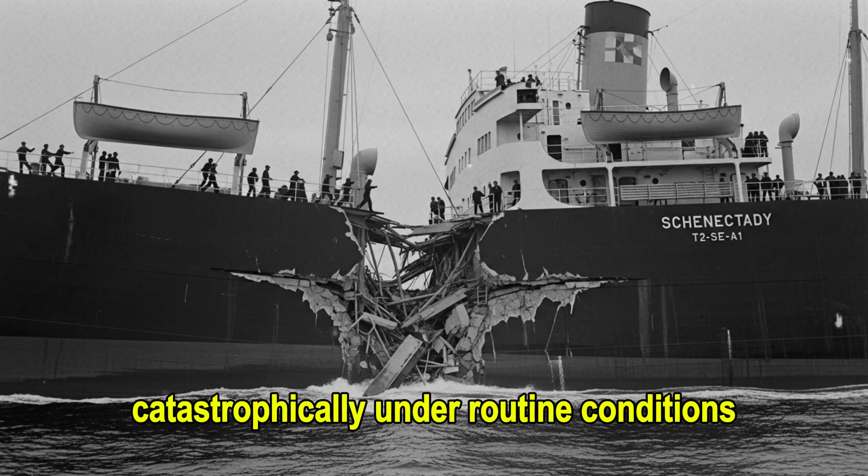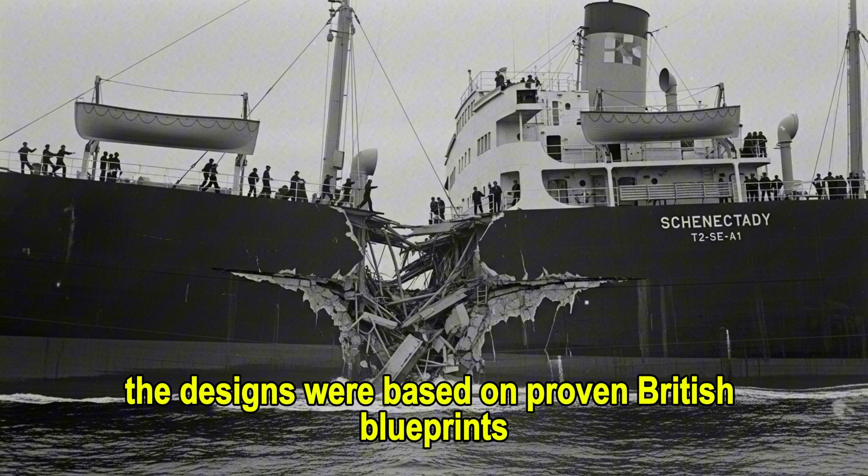But then the nightmare began. Ships started breaking spontaneously, catastrophically under routine conditions. Naval architects were baffled. The welds looked solid, the steel met specifications, the designs were based on proven British blueprints. Yet Liberty ships fractured like porcelain teacups, the cracks propagating at terrifying speed. The miracle of mass production had become a maritime nightmare, and no one could explain why.

This is a story of a hidden flaw, a looming disaster, and how an unexpected hero emerged from the most unlikely place. Stay tuned as we unravel this incredible historical mystery.

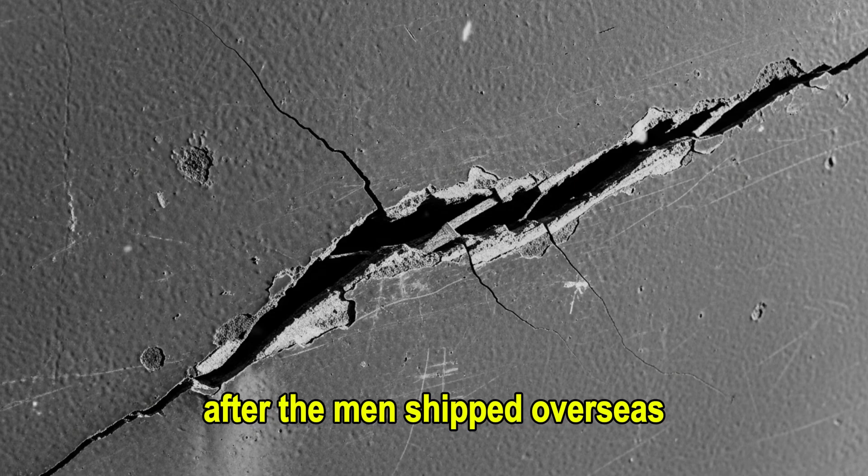The answer came from the least likely source, a welder on the assembly line who wasn't supposed to question engineering decisions. Bessie Hamill worked the graveyard shift at Kaiser's Richmond Yard No. 3, one of thousands of women who'd flooded into shipyard work after the men shipped overseas. She'd been welding hull sections for 8 months, long enough to notice something the engineers apparently hadn't.

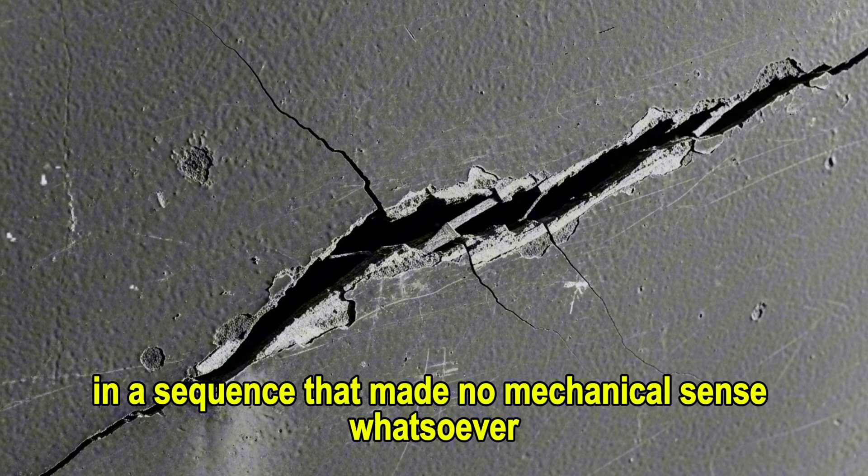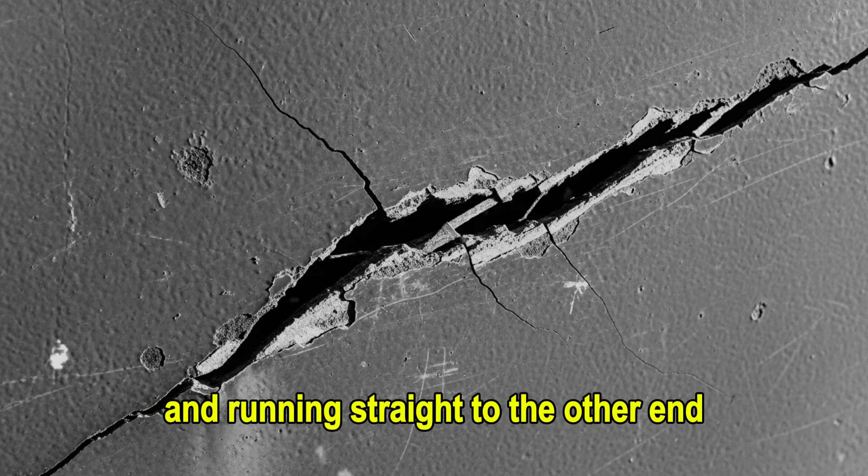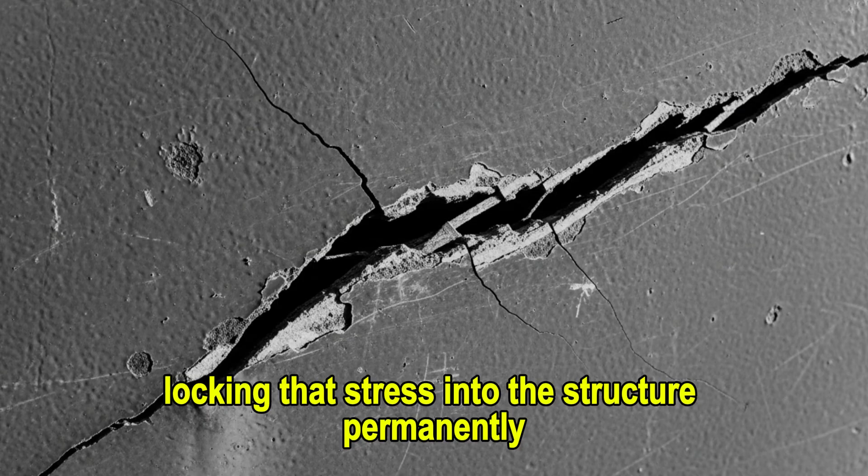Every night, she watched her team weld massive steel plates in a sequence that made no mechanical sense whatsoever. Hamill saw welders starting at the edges of plates and working inward, or beginning at one end of a long seam and running straight to the other end. As each weld cooled, the metal contracted, pulling and warping the plates. She could see the stress building, watch the steel distorting under her torch. When welders finished one section and moved to the next, they were effectively locking that stress into the structure permanently. It was like tightening the center bolts on a car wheel before securing the outer ones, a recipe for imbalance and failure.

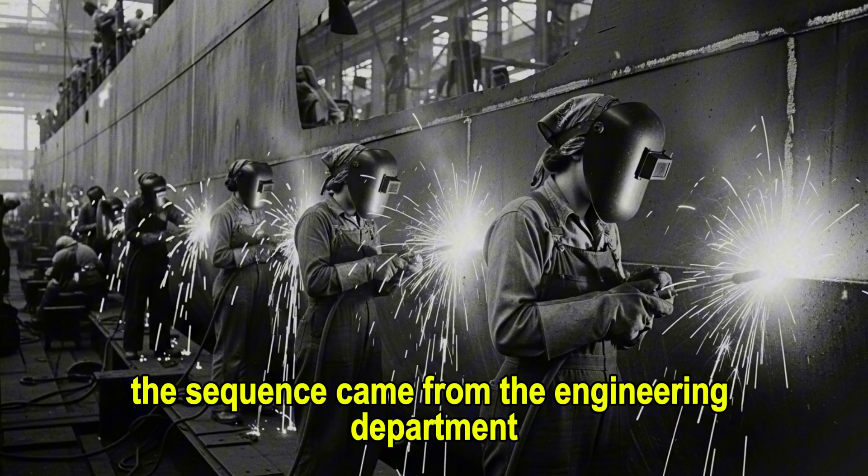Her foreman dismissed her concerns. She was a welder, not an engineer. The sequence came from the engineering department, from men with college degrees and naval architecture training.

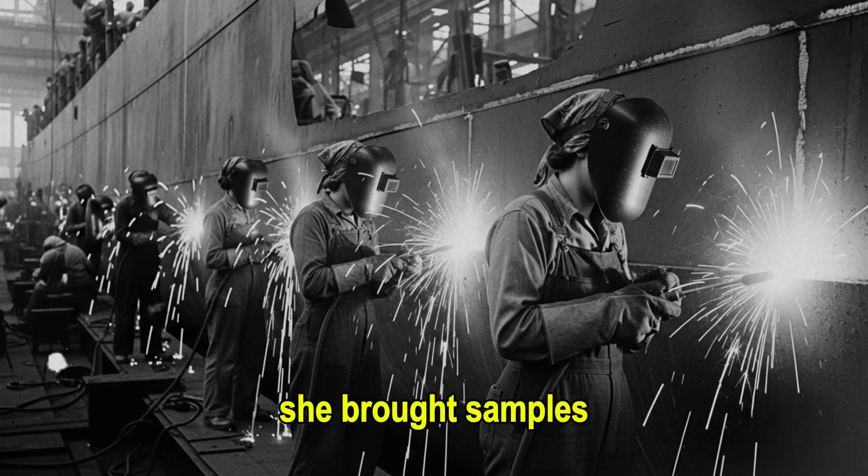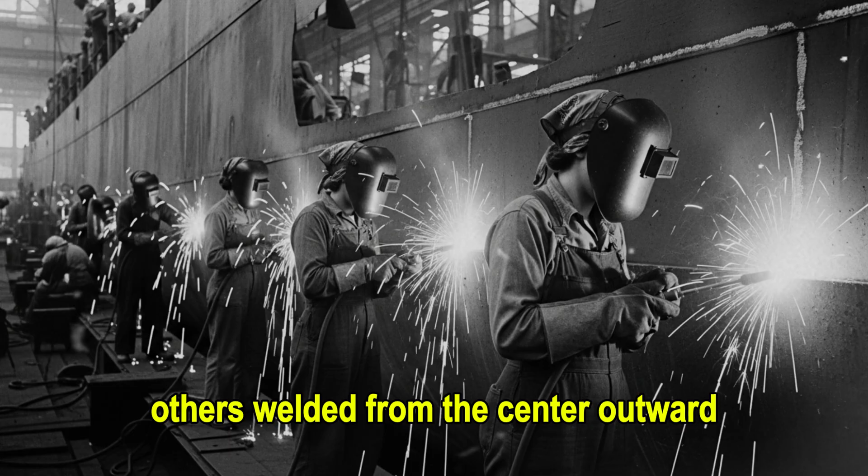Hamill persisted anyway. In November 1943, she requested a meeting with yard supervisors, breaking chain of command protocol that could have gotten her fired. She brought samples, test plates she'd welded on her own time using different sequences. Some showed significant warping and visible stress patterns. Others, welded from the center outward in a carefully planned sequence, lay flat and true with minimal distortion.

The supervisors were skeptical but intrigued. One agreed to observe the production line during Hamill's shift. What he saw confirmed her observations. Welders were essentially torturing the steel, forcing it to accept stresses it would carry for its entire service life.

Every cooling weld created residual tension in the metal. The construction sequence meant these internal stresses accumulated and concentrated at specific points, particularly at the corners of hatch openings and other stress concentration points. When those ships hit cold North Atlantic water, the steel became brittle. The locked-in residual stress combined with brittleness created perfect conditions for catastrophic fracture.

Hamill's insight was elegantly simple: weld from the center of sections outward, allowing stress to dissipate toward the edges rather than concentrate in the middle. Alternate welding locations to prevent heat buildup in any single area. Never complete welds in long continuous runs. Instead, use a balanced sequence that distributed cooling stresses evenly. These weren't revolutionary metallurgical theories. They were practical observations from someone who actually worked with the material every day, who felt the metal move under her torch, and recognized the consequences.

By December 1943, her observations reached Henry Kaiser himself. He faced a brutal choice.

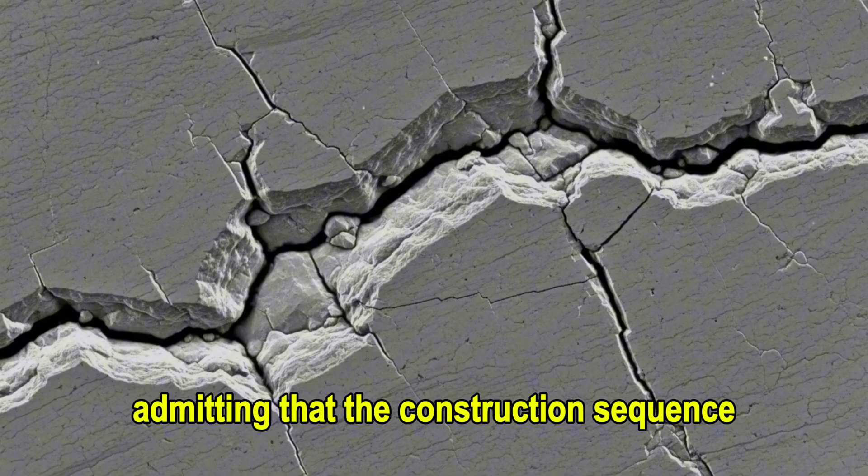The Liberty ship program was already under congressional scrutiny for the cracking epidemic. Admitting that the construction sequence, not the steel quality or weld integrity, was the fundamental problem meant acknowledging that every ship built so far had systematic flaws baked into their hulls. It meant temporarily slowing production to retrain thousands of welders. It meant redesigning the entire assembly process. But it also meant potentially solving the fracture crisis that threatened to undermine America's entire maritime logistics chain.

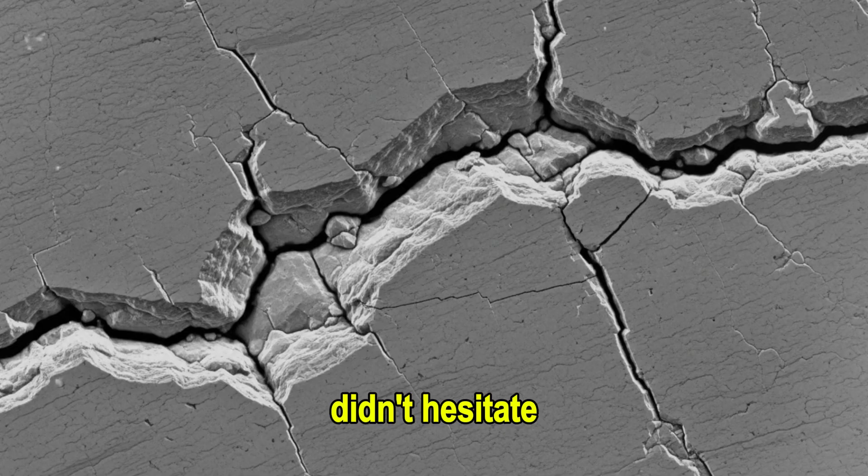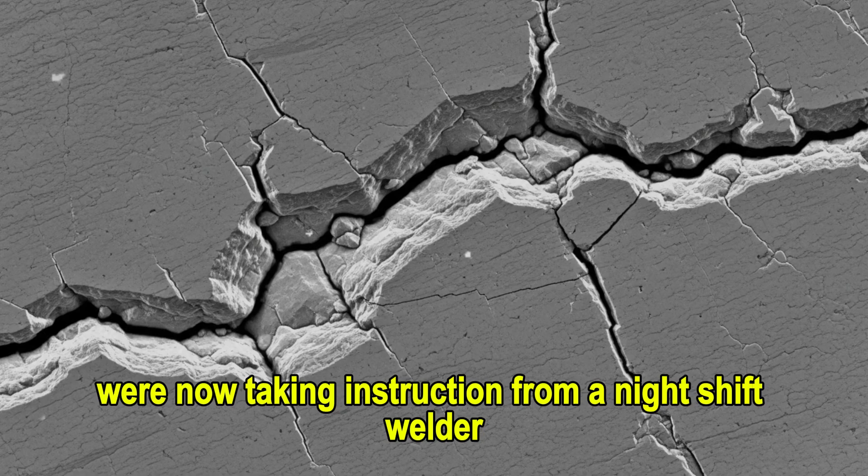Kaiser, to his credit, didn't hesitate. He authorized immediate testing of Hamill's theories, pulling an entire hull section from the production line for experimental reconstruction. The metallurgists and engineers who'd spent months analyzing failed ships were now taking instruction from a night shift welder who'd never seen the inside of a college classroom.

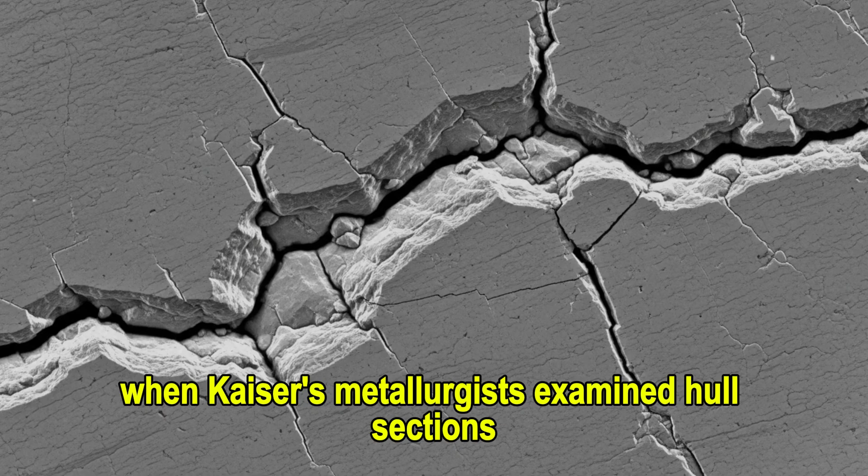The physics behind the failures finally became clear. Steel is not a static material. It's a crystalline structure that responds dynamically to temperature changes. When welders run a torch along a seam, they're creating a localized temperature exceeding 2,500 degrees F. The metal expands dramatically in that heat zone. As the weld cools, it contracts, but the surrounding cold steel constrains that contraction. The result is residual tensile stress locked permanently into the structure unless the welding sequence allows the stress to redistribute.

Liberty ships were suffering from what metallurgists call brittle fracture propagation. The steel used in their hulls, a carbon steel designated as shipbuilding grade, performed adequately in warm water, but underwent a critical transformation in the North Atlantic's near-freezing temperatures. Below roughly 40 degrees F, the steel's ductility collapsed. Normally, metal absorbs stress by deforming slightly, bending rather than breaking. Cold steel loses that flexibility. It becomes brittle, more like glass than the tough material welders worked with in California's mild shipyards.

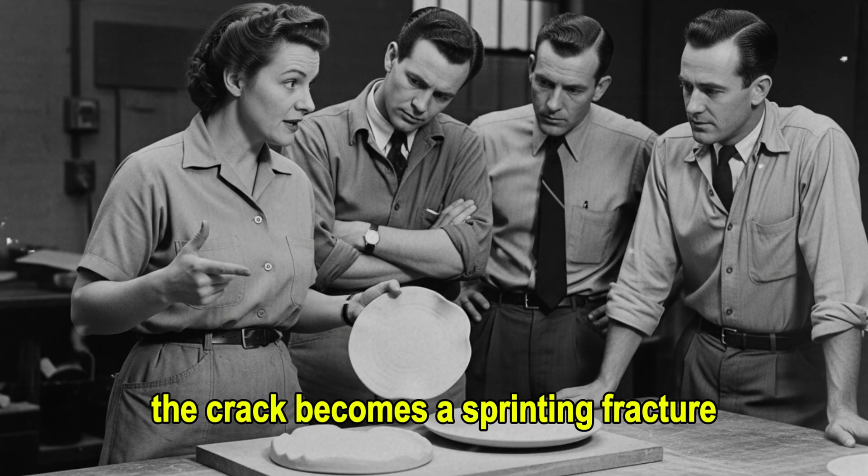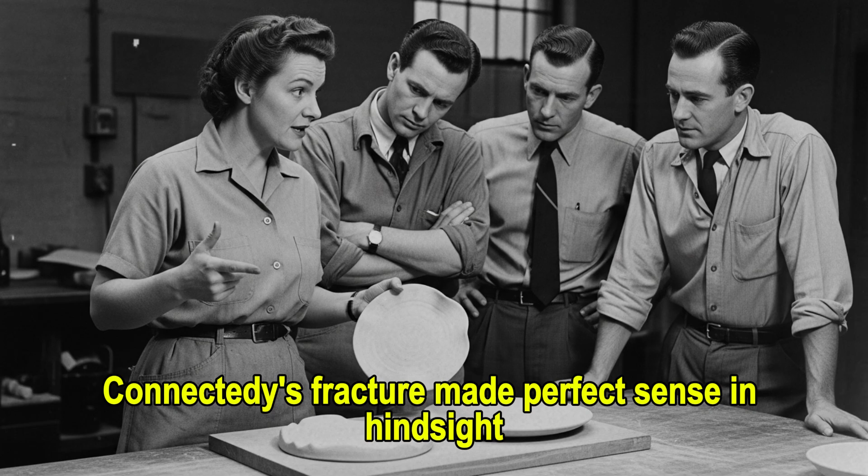The SS Schenectady's fracture made perfect sense in hindsight. She'd been built in early winter, welded in sequences that maximized residual stress. Her hull carried tens of millions of pounds of locked-in tension. When the Portland morning dropped to 28 degrees, the steel became brittle. The stress concentration at a hatch corner initiated a crack. That crack found a straight path through continuously welded deck plates. No riveted seams to slow it, no stress relief breaks to stop it. The fracture consumed the ship in seconds, releasing decades' worth of stored energy in one catastrophic failure.

Traditional riveted ships didn't suffer this problem, and the reason illuminated why welding seemed cursed. Riveted construction is inherently discontinuous. Each riveted plate is a separate element. Cracks that start in one plate hit a riveted seam and stop. The overlapping plates and mechanical fasteners create natural crack arresters. Welded ships are continuous structures. A crack in one plate can run unimpeded through hundreds of feet of welded seams. The efficiency that made welded ships faster to build also made them vulnerable to failures riveted ships couldn't experience.

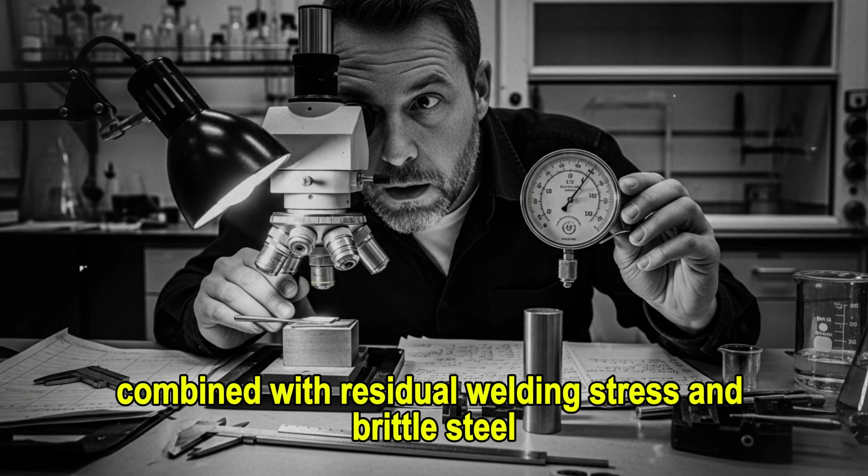The Liberty ship's squared-off design compounded the problem. British maritime architects had specified those hard corners for easier cargo loading. Nobody considered that sharp internal corners create stress concentrations that multiply applied loads by huge factors. Every wave that flexed the hull sent stress spikes through those corners. Combined with residual welding stress and brittle steel, those corners became crack initiation sites, waiting for the right conditions to fail catastrophically.

Henry Kaiser understood what the test results meant for his empire and the war effort. In January 1944, he made a decision that would either vindicate his industrial revolution or expose him as a reckless profiteer who'd sent thousands of sailors to sea in defective ships. He ordered a complete halt to Liberty ship production at Richmond Yard 2 and diverted resources to an entirely new class of vessel, the Victory ship.

This wasn't a minor modification. It was a fundamental redesign built around Bessie Hamill's welding observations and the hard-earned lessons written in fractured hulls across two oceans. The gamble was staggering.

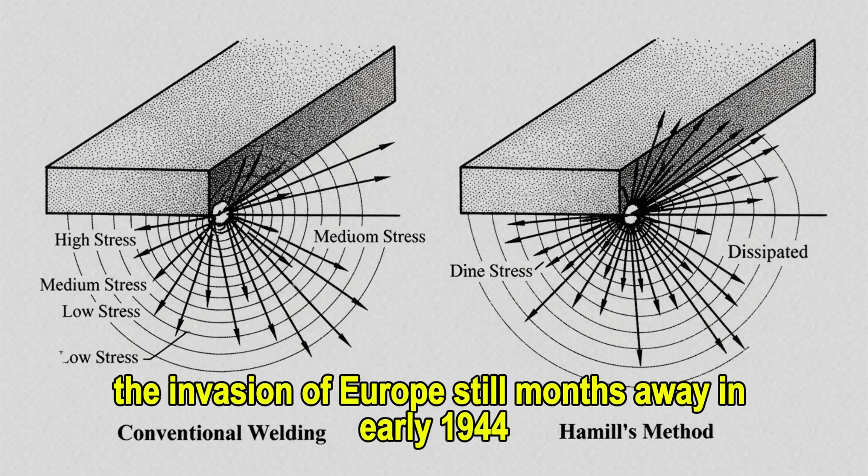Liberty ships were still desperately needed. U-boats had sent over 2,000 Allied merchant vessels to the bottom since 1939. The invasion of Europe, still months away in early 1944, would require the largest amphibious logistics operation in human history.

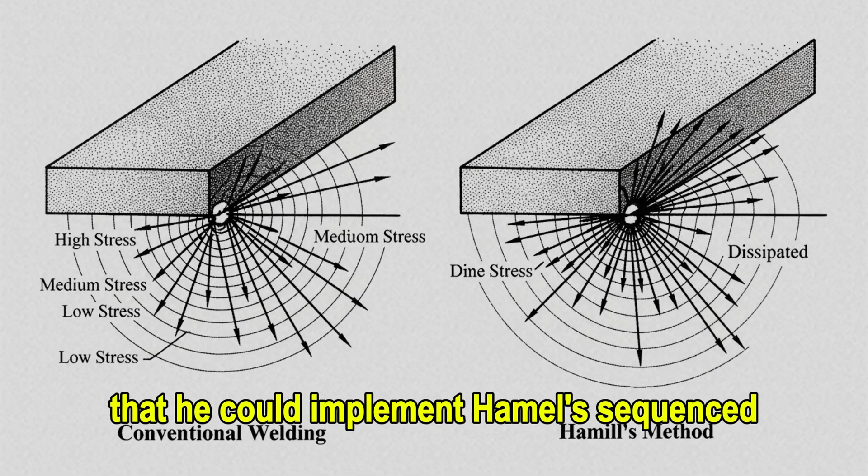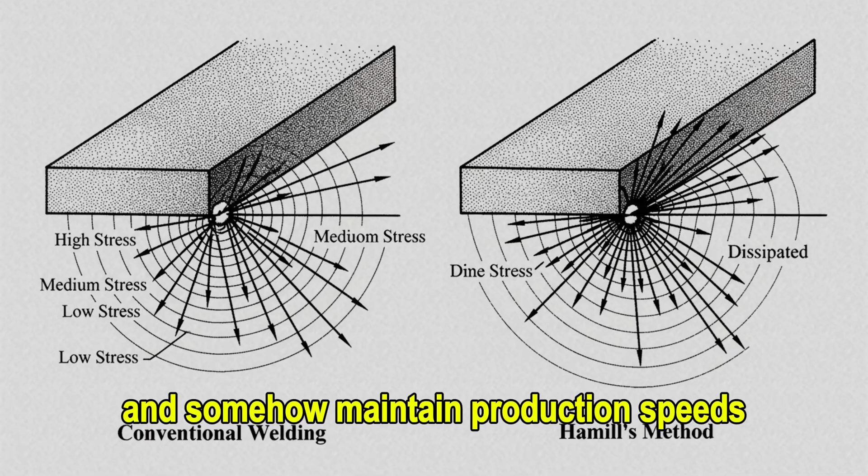Every ship mattered, yet Kaiser was betting he could implement Hamill's sequenced welding system, redesign the hull to eliminate stress concentrations, improve the steel specifications, and somehow maintain production speeds that already seemed miraculous. His competitors thought he'd lost his mind. Congressional investigators sharpened their knives, ready to crucify him if production collapsed.

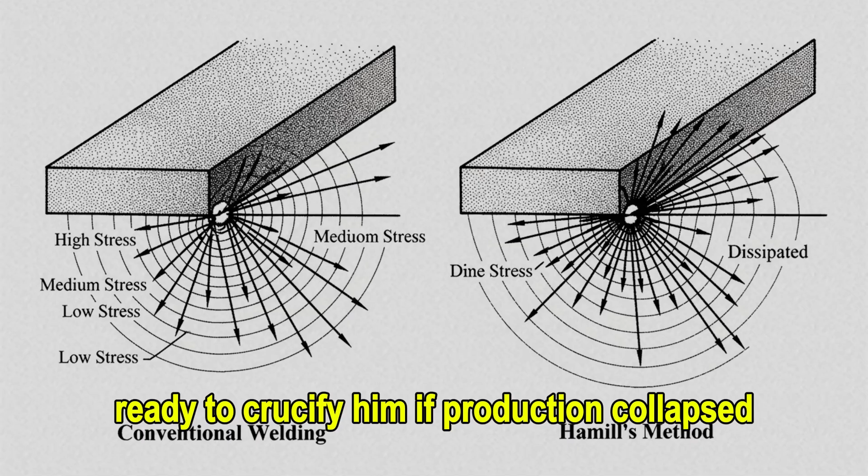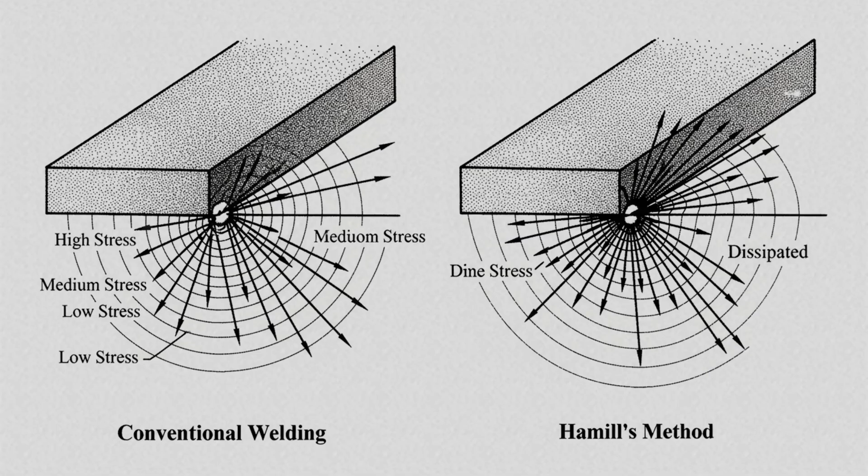Kaiser's engineers worked backward from the failure points. Every square corner in the Liberty design got replaced with rounded transitions. The hatch openings that had birthed so many cracks were redesigned with generous radii, eliminating the stress multipliers that turn normal loads into fracture initiators.

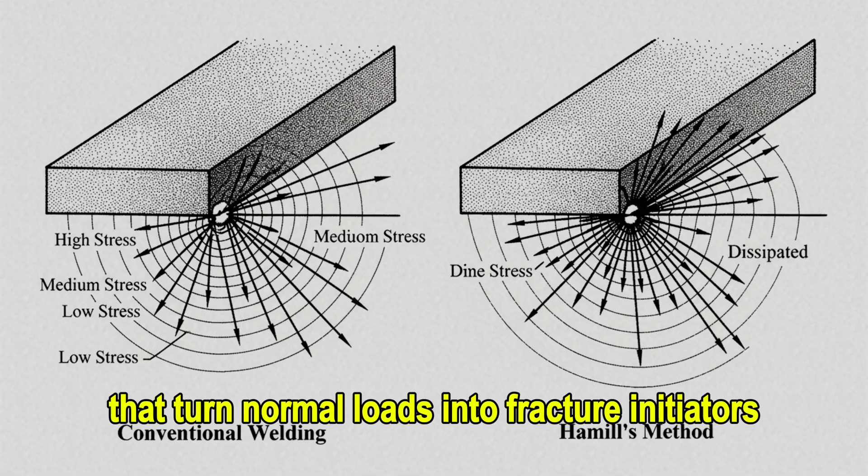The deck and hull plate thicknesses were recalculated not to add strength but to ensure stress distribution matched the new welding sequences. Structural frames were repositioned to align with natural stress relief points rather than fighting against the welding pattern.

The steel itself changed. Kaiser's metallurgists specified a new alloy designation with improved low-temperature toughness. The carbon content was reduced slightly, and manganese content increased. Small additions of nickel, expensive and rationed for armor plate, were justified by demonstrating that 0.25% nickel content dramatically improved the steel's resistance to brittle fracture.

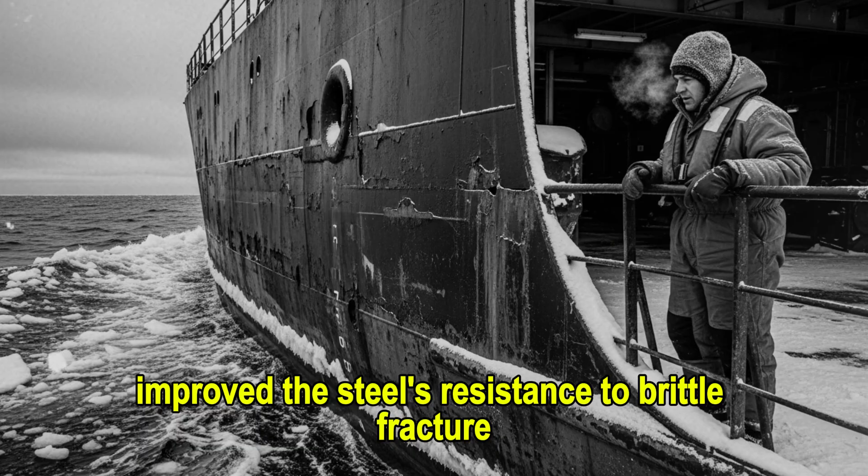The Maritime Commission balked at the cost until Kaiser presented calculations showing that one prevented ship loss would pay for the upgraded steel in 50 vessels. In March 1944, the new steel specification was approved.

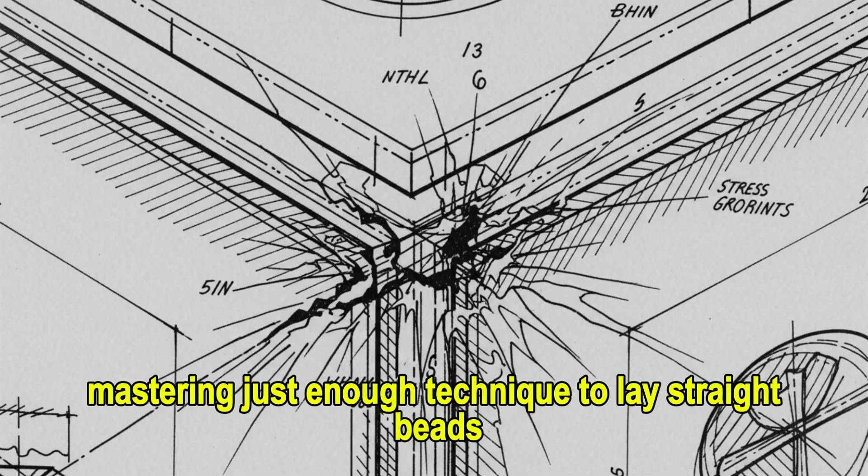Then came the massive undertaking of retraining the workforce. Richmond shipyards employed over 90,000 workers by early 1944. Thousands were welders who'd learned their trade in weeks-long crash courses, mastering just enough technique to lay straight beads at production speed. Now they needed to understand sequencing, stress relief, and thermal management.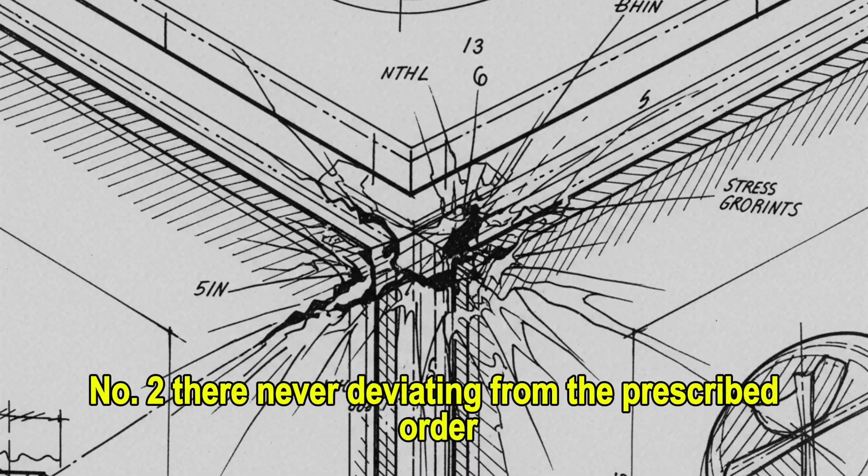Kaiser established welding schools within the yards, pulling experienced welders like Hamill off the line to teach. Every welder received a numbered sequence card for each hull section: weld number 1 here, number 2 there, never deviating from the prescribed order.

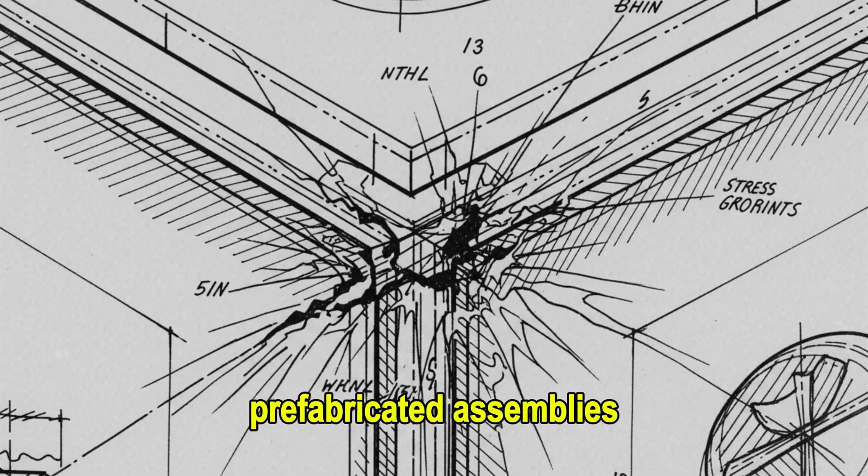The prefabrication system expanded dramatically. Rather than welding large sections on the ways where sequencing was difficult to control, Kaiser's planners broke victory ships into smaller modules constructed in dedicated shops. A bow section might contain 50 separate prefabricated assemblies, each welded in controlled conditions using optimal sequences, then stress-relieved in heating ovens before final assembly.

This modular approach meant welders could work from the center of each small section outward, exactly as Hamill had demonstrated, without the constraints of assembling a full hull.

The skeptics had ammunition when the first victory ship keel was laid in February 1944. Construction took 18 days, slower than Liberty ship records. Kaiser's yards weren't achieving miracles anymore; they were building ships at merely impressive speeds. The second victory ship took 16 days. Critics declared the program a failure, proof that quality and speed were incompatible.

Kaiser ignored them. He was watching crack inspection reports, not just construction times. The first two victory ships showed zero stress cracks in post-construction inspection. Not reduced cracks—zero. By April 1944, Richmond Yard 2 had transformed into a precision choreography of steel, fire, and human coordination that would have seemed impossible two years earlier.

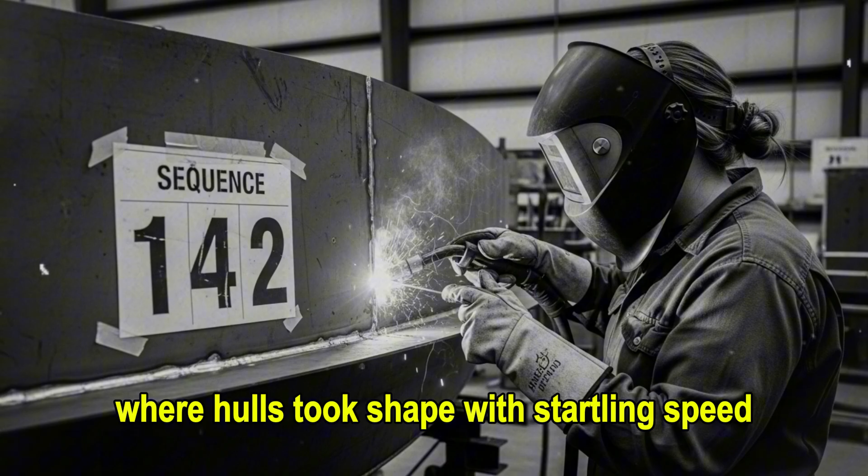The yard didn't look like a traditional shipyard anymore. It resembled an enormous assembly plant, with distinct fabrication zones feeding a central assembly area where hulls took shape with startling speed. Kaiser had borrowed Henry Ford's moving assembly line concept, but instead of the product moving, specialized teams rotated through stationary construction stations in timed intervals.

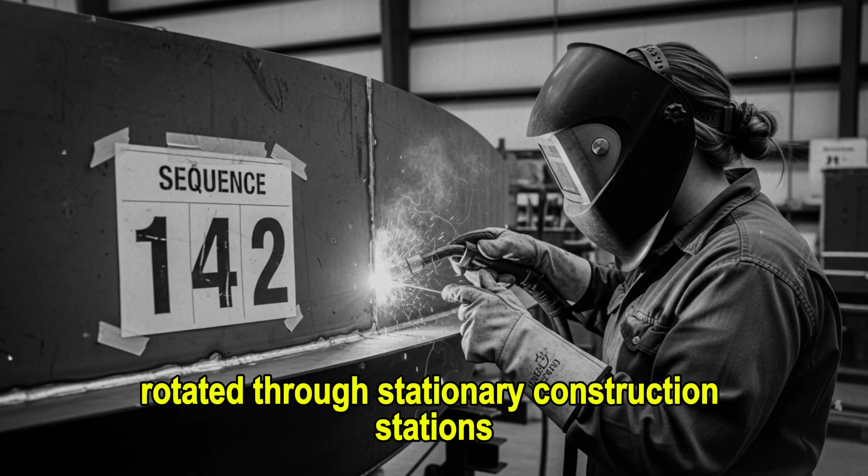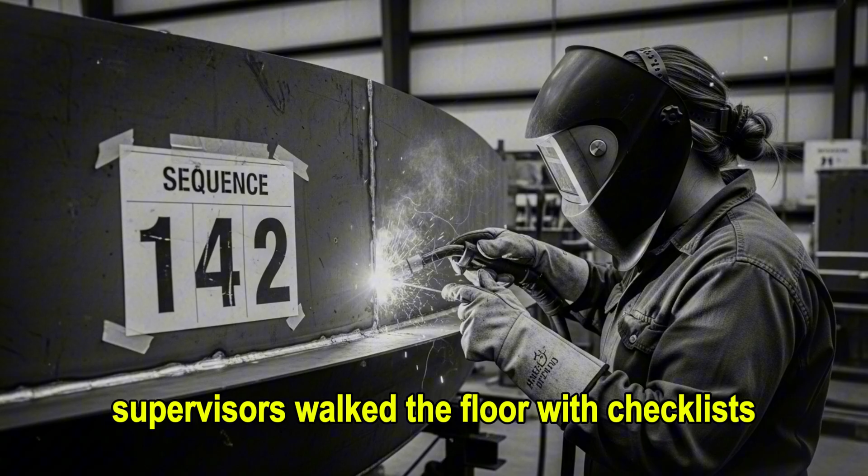The process began in the prefabrication shed's massive covered structures, where welders worked on hull sections no larger than 30 feet in any dimension. Each section had a specific sequence card. A bottom plate assembly might require 47 individual welds, numbered and color-coded. Welders started at position 1, always the geometric center of the section, and worked outward in a spiral or radial pattern. Supervisors walked the floor with checklists, ensuring nobody skipped ahead.

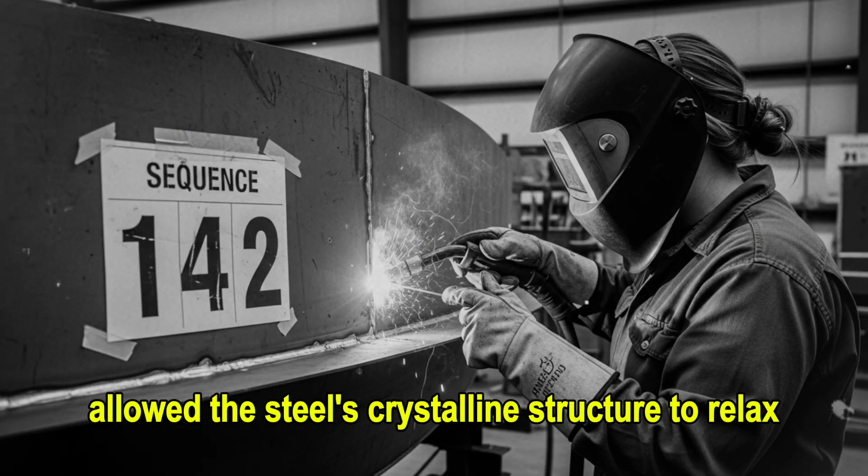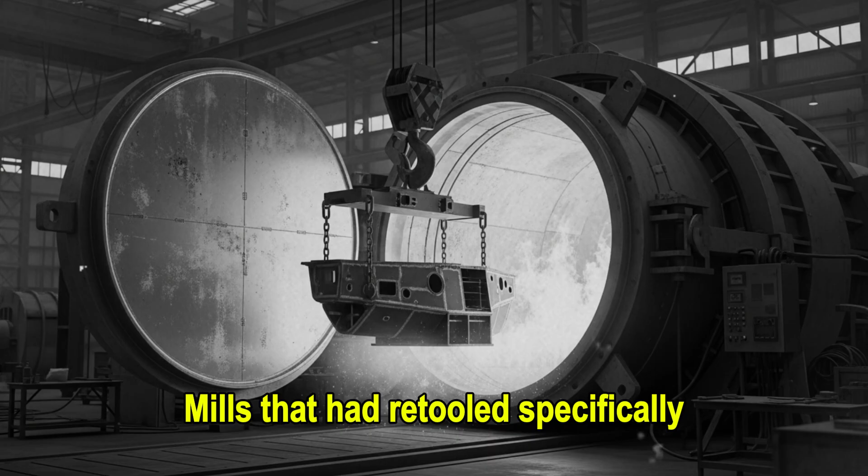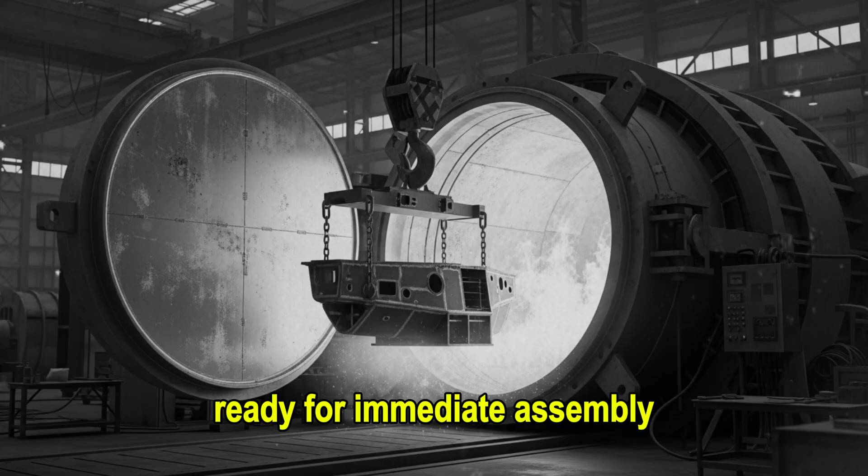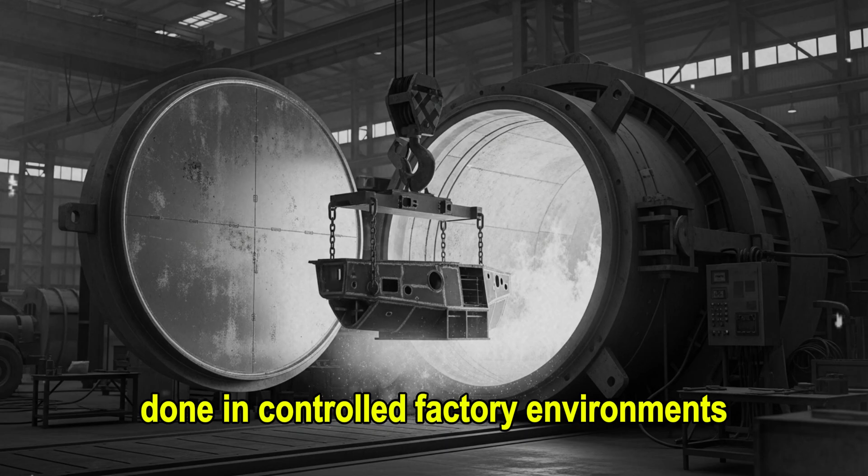The steel itself arrived pre-cut and pre-formed from rolling mills that had retooled specifically for victory ship production. Unlike Liberty ships, where yard workers cut and shaped plates on site, victory ship components arrived ready for immediate assembly. Curved bow sections came pre-formed to exact specifications. Deck plates had pre-drilled bolt holes for temporary alignment. Frame sections were pre-welded assemblies. This preparation work, done in controlled factory environments, eliminated variables and ensured consistency across thousands of components.

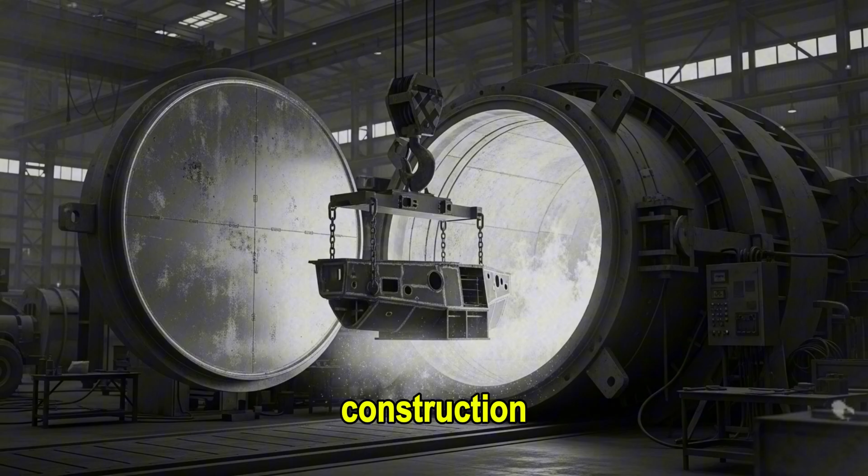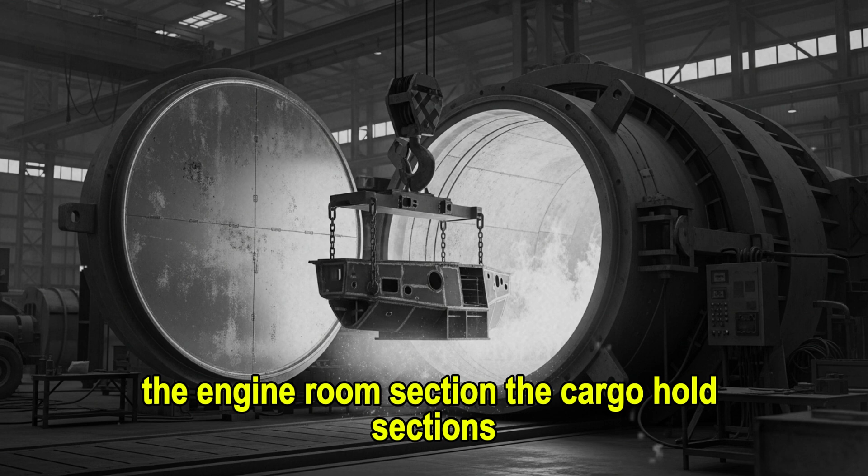Assembly on the building ways followed a radically different sequence than Liberty construction. Instead of starting at the keel and building upward, victory ships were assembled in large modules that came together almost simultaneously. The engine room section, the cargo hold sections, the bow and stern, all were constructed in parallel, then lifted by massive gantry cranes and positioned in a single coordinated operation.

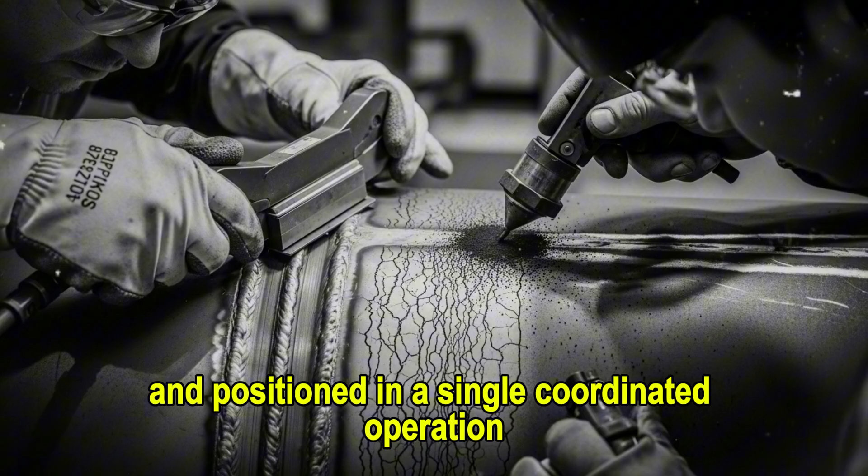On May 12, 1944, Yard 2 executed its most ambitious assembly yet.

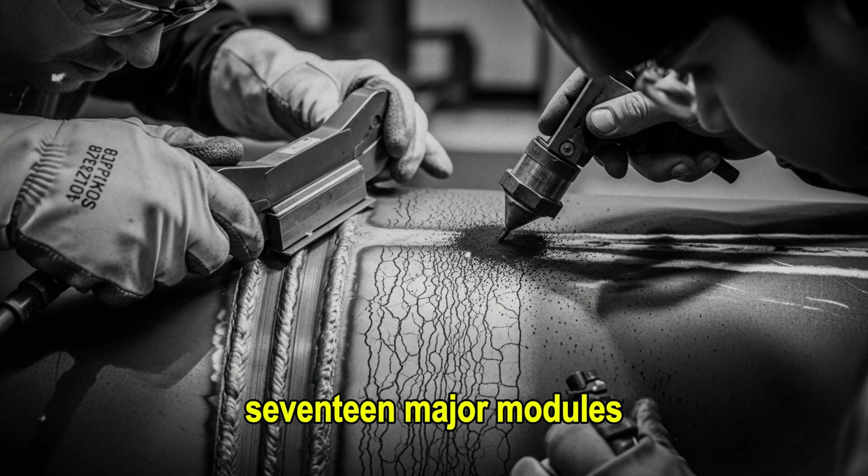17 major modules, representing 85% of a complete hull, were positioned and aligned in just 11 hours. Welders then connected these modules using the same center-outward sequences, but now they were joining stress-relieved sections rather than building stressed sections from scratch. The 5-day timeline became reality through relentless optimization of every minute.

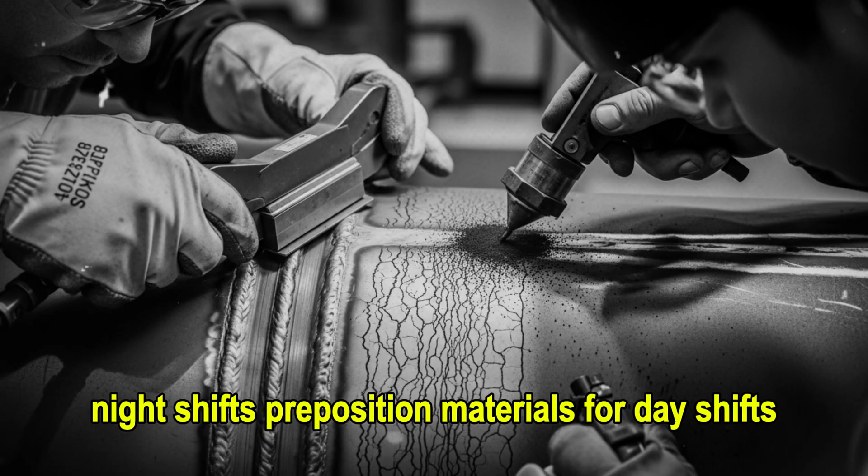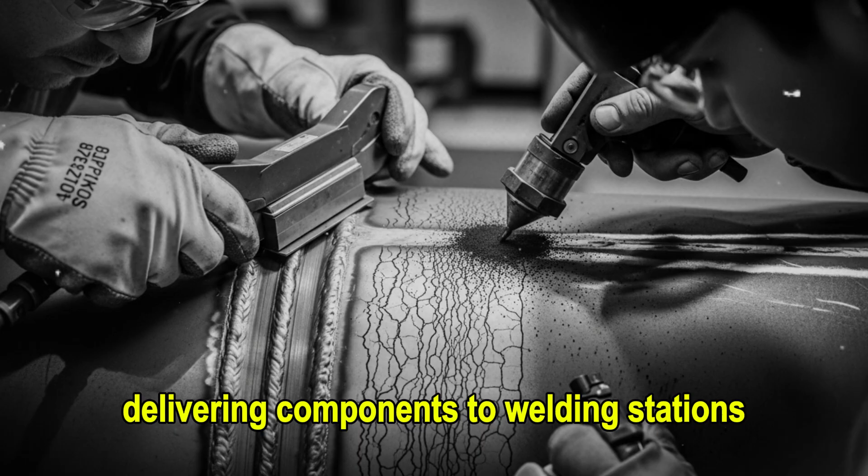Night shifts prepositioned materials for day shifts. Specialized teams did nothing but check alignment and weld quality, catching errors before they propagated. Mobile cranes moved on scheduled routes, delivering components to welding stations within 5-minute windows.

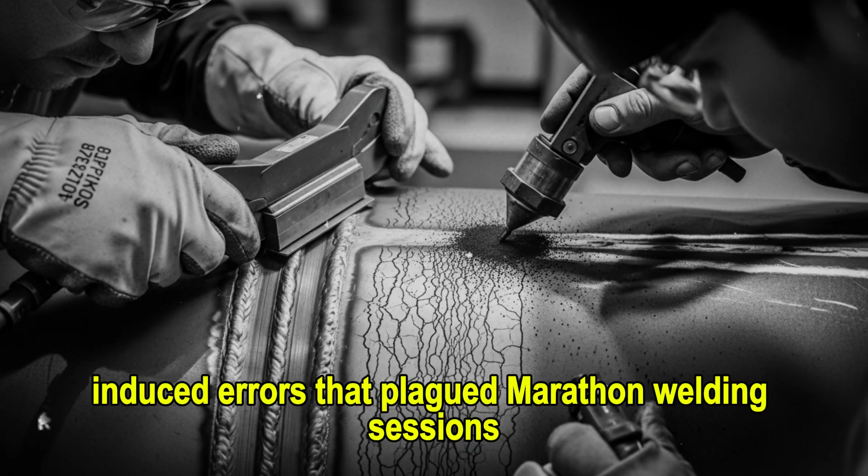Welders worked in rotation: 30 minutes on the torch, 10 minutes rest, maintaining consistent quality without the fatigue-induced errors that plagued marathon welding sessions. Kaiser implemented what he called the critical path method, tracking which tasks were bottlenecks and which could proceed in parallel. If frame installation was ahead of schedule but pipe fitting was lagging, he shifted workers immediately, maintaining balance across all construction phases.

Every delay, every deviation from schedule was documented and analyzed. Morning meetings reviewed the previous day's performance, identifying solutions before small problems became catastrophic delays.

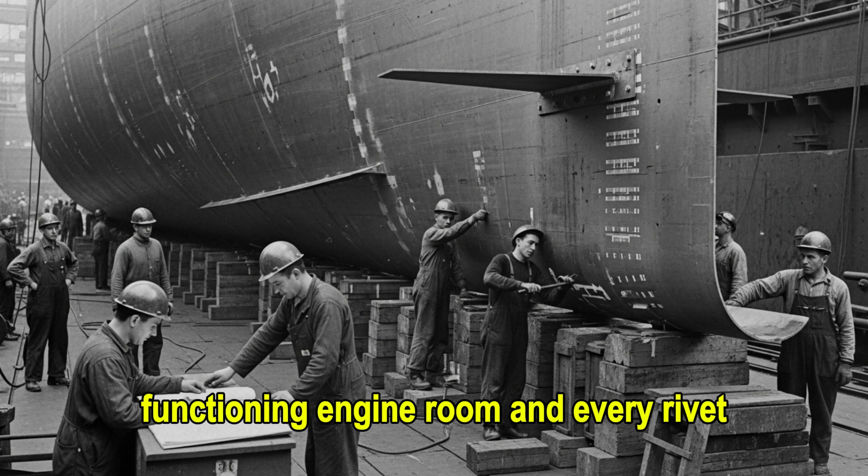The record came on June 27, 1944. The SS Benjamin Warner Victory Ship, hull No. 23, was completed from keel laying to sea trials in 5 days and 11 hours. Not a stripped-down demonstration ship, but a fully equipped combat-ready cargo vessel with defensive armaments, complete electrical systems, functioning engine room, and every rivet executed to the new stress.

Relief protocols. She carried no hull cracks. Her post-construction inspection revealed stress levels within normal operating ranges. When the Warner sailed for her shakedown cruise, she performed flawlessly in conditions that would have fractured early Liberty ships.

The 5-day Victory ship wasn't just about speed. It represented a complete rethinking of how complex machines could be manufactured when engineering principles aligned with practical construction reality. Bessie Hamill's observation had cascaded into a systematic transformation of industrial shipbuilding.

The Victory ships that emerged from Kaiser's redesigned production system were fundamentally different vessels from their Liberty predecessors. Even though casual observers saw similar cargo haulers with identical missions, the differences began at the molecular level and extended through every aspect of design and construction. Where Liberty ships had been emergency stopgaps, Victory ships were engineered solutions that addressed every failure mode written in the blood of sailors who'd ridden fracturing hulls into cold Atlantic waters.

The improved steel specification proved critical. The new alloy, designated as killed steel because aluminum was added during production to remove oxygen, demonstrated dramatically improved toughness at low temperatures. Laboratory tests showed the transition temperature, the point where steel shifts from ductile to brittle behavior, had dropped from approximately 40 degrees Fahrenheit in Liberty ship steel to near 5 degrees. This 35-degree improvement meant Victory ships retained their structural flexibility in conditions that turned Liberty hulls into fragile shells. The cost premium was 8% per ton, but the performance gain was incalculable.

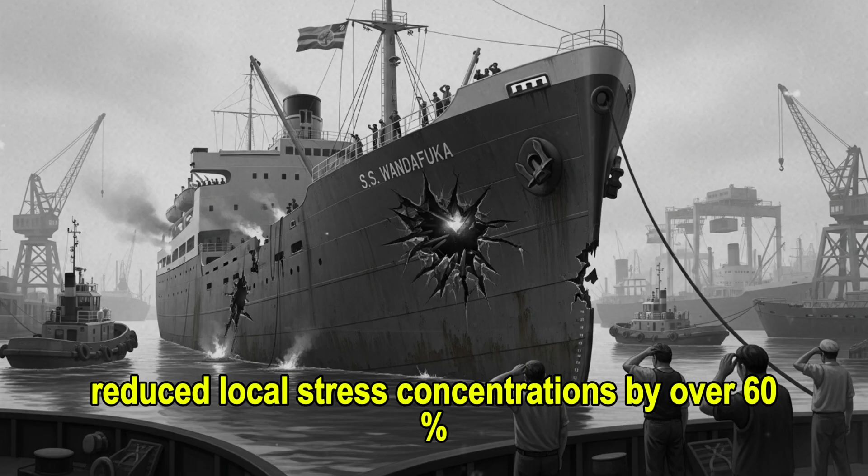Every structural detail reflected the new understanding of stress concentration and crack propagation. The rounded hatch corners, seemingly a minor aesthetic change, reduced local stress concentrations by over 60%. Engineering calculations showed that the sharp 90-degree corners in Liberty ships created stress multipliers of 3.5 to 4 times the nominal hull stress. The Victory ship's generous radii kept stress multipliers below 1.8. In practical terms, this meant a wave impact that would initiate a crack in a Liberty ship merely flexed a Victory ship's hull within normal elastic limits.

The hull plates themselves were installed with crack arrestor features built into the structure. Rather than continuous welds running hundreds of feet, Victory ships incorporated riveted seams at strategic intervals. These hybrid connection points provided intentional discontinuities, places where a propagating crack would hit a mechanical joint and lose energy, potentially stopping before consuming the entire hull. The design accepted that cracks might initiate but engineered multiple arrest mechanisms to prevent catastrophic propagation. It was defensive engineering, planning for failure modes rather than assuming perfection.

Structural frames were doubled at critical stress points, creating redundant load paths. If one frame developed cracks, adjacent frames could carry the load until repairs were made in port. Liberty ships had no such redundancy. A single frame failure often led to progressive collapse as loads redistributed to already stressed adjacent structures. Victory ships could sustain damage that would sink a Liberty ship and remain operational, limping to port on compromised but functional structures.

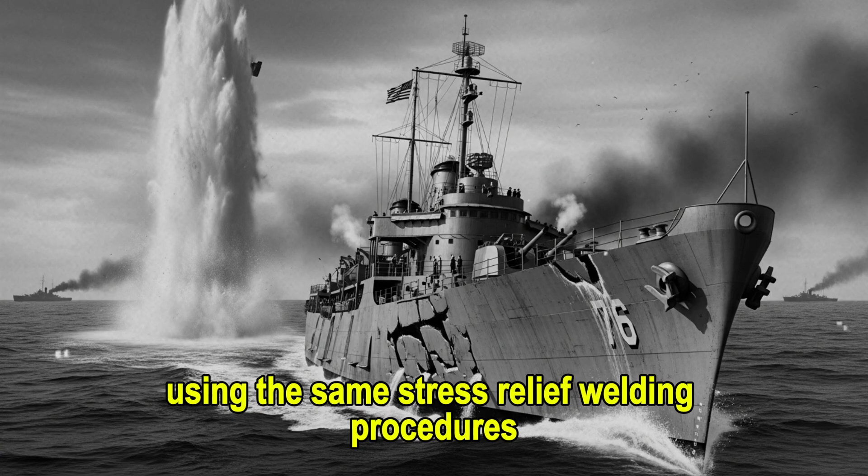The proof emerged in operational service. Between June 1944 and the war's end in August 1945, 531 Victory ships entered service. Not one suffered catastrophic hull failure. Minor cracks appeared in a handful of vessels, stress concentrations that inspection caught before they propagated. These cracks were repaired using the same stress relief welding procedures, and the ships returned to service.

The contrast with Liberty ships was absolute and damning. The human arithmetic of Victory ships versus Liberty ships played out across two oceans in 1944 and 1945, written in lives saved and missions completed that would have ended in disaster with earlier vessels.

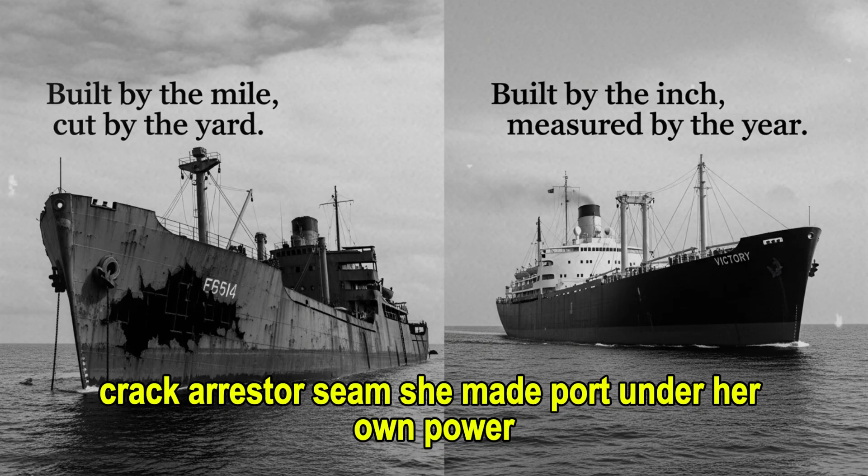The SS Wandafuka, a Victory ship, hit a mine off Okinawa in April 1945. The explosion tore a 20-foot gash in her hull below the waterline. Crew expected the catastrophic crack propagation that killed Liberty ships. Instead, the fracture stopped at the first riveted crack arrestor seam. She made port under her own power, was repaired in 6 days, and returned to service.

A Liberty ship with identical damage, the SS Richard Hovey, suffered a comparable mine strike in February 1945, cracked longitudinally for over 90 feet, broke her keel and sank in 14 minutes with the loss of 37 crew.

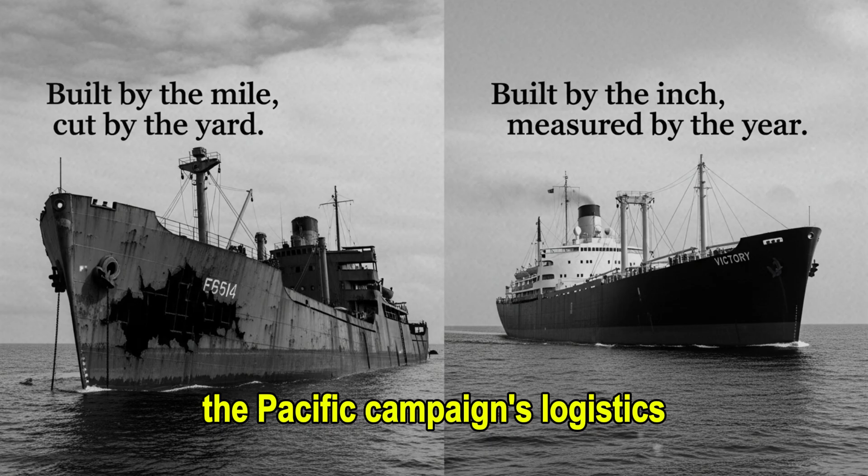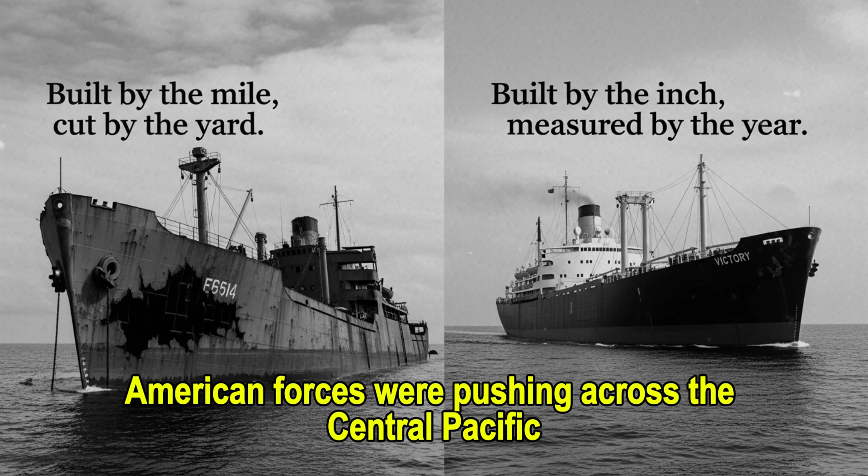The Pacific Campaign's logistics would have been impossible without Victory ships' reliability. By June 1944, American forces were pushing across the Central Pacific toward the Philippines and ultimately Japan. Each island advance required millions of tons of supplies moved across thousands of miles of ocean.

Liberty ships could make the voyage, but their structural fragility meant reduced cargo loads in rough seas, slower transit speeds to minimize hull stress, and the constant risk of catastrophic failure, far from any rescue. Victory ships ran full loads at their design speed of 15 knots, 3 knots faster than Liberty ships, through typhoon-prone waters without the paralyzing fear that a cold night and rough seas would split the hull.

The numbers told the story. Between D-Day in June 1944 and VJ Day in August 1945, Victory ships moved over 18 million tons of cargo with zero losses to structural failure.

They operated in North Atlantic convoys, where water temperatures routinely dropped below 35 degrees, conditions that had fractured dozens of Liberty ships. They sailed Arctic routes to Murmansk, carrying Lend-Lease supplies to the Soviet Union, where seawater temperatures near freezing had made Liberty ships terrifyingly vulnerable.

The SS Hobart Baker, a Victory ship, made 17 Murmansk runs without a single stress crack. The Liberty ship John Walker, running the same route, developed cracks on her second voyage and was withdrawn from Arctic service permanently. Crew morale transformed when sailors transferred from Liberty ships to Victory vessels.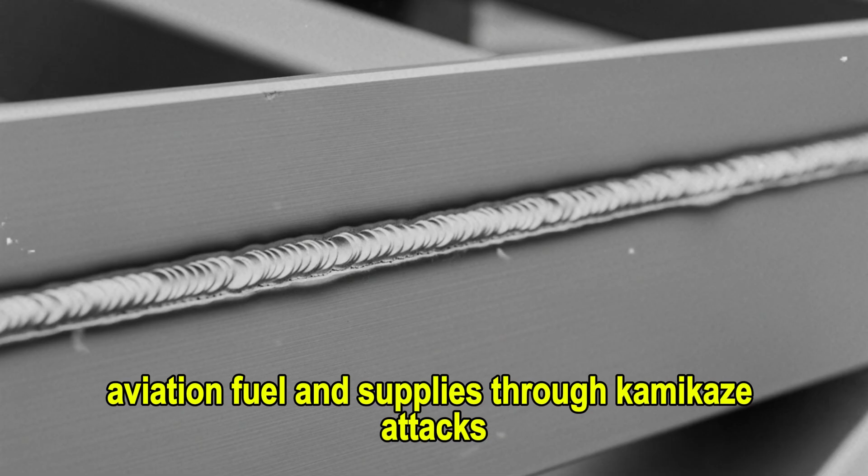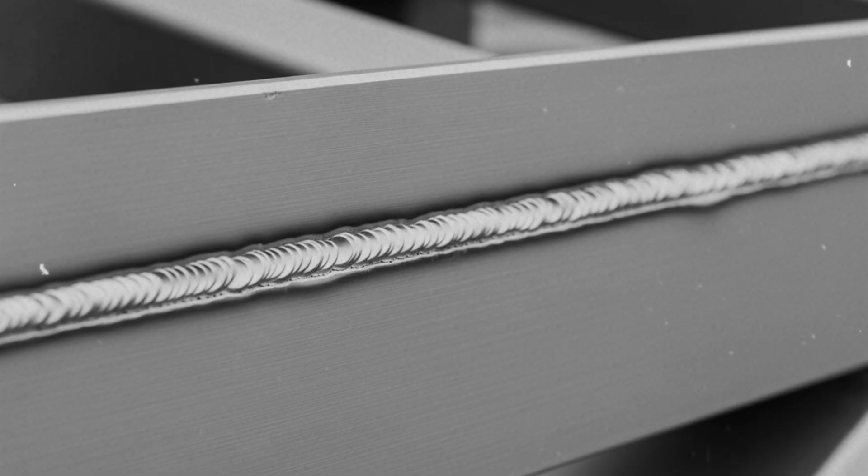Victory ships supported the invasion fleet, hauling ammunition, aviation fuel, and supplies through kamikaze attacks in typhoon conditions. The SS Kyle Johnson took near-miss bomb damage that buckled deck plates and cracked 3 frame sections. She continued operations, unloading cargo under fire for 4 days before withdrawing for repairs.

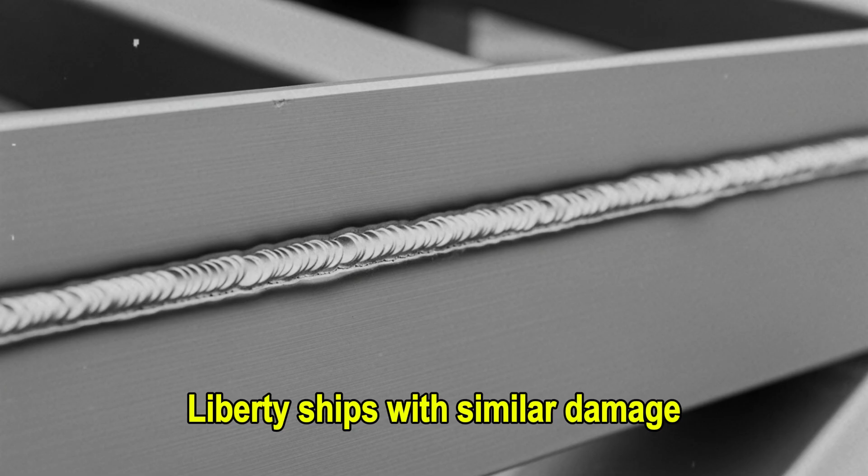The structural redundancy and crack arrest features kept minor damage from cascading into catastrophic failure. Liberty ships with similar damage typically had to be abandoned, as the cracks propagated beyond control.

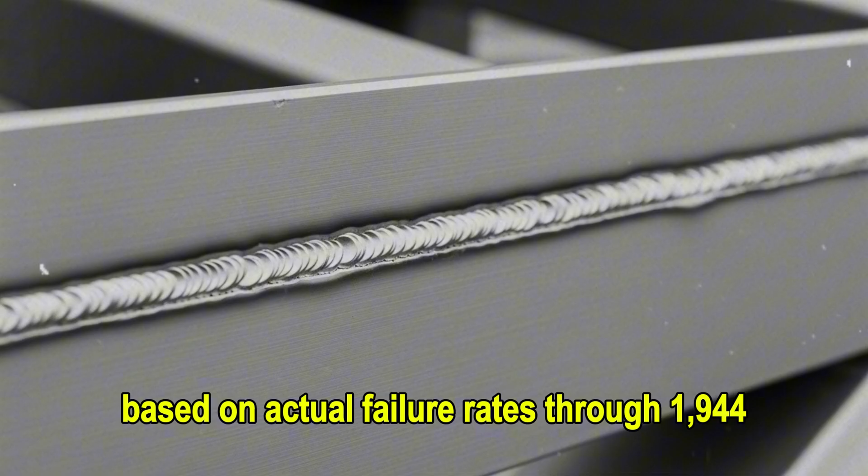The economic calculation was brutal but clear. Each Liberty ship cost approximately $2 million to build. Victory ships cost $2.6 million, or 30% more expensive. But a Liberty ship had a 4.6% chance of catastrophic structural failure during her service life, based on actual failure rates through 1944. Those failures killed an average of 18 crew per incident and destroyed cargo worth 3 to 5 times the ship's construction cost.

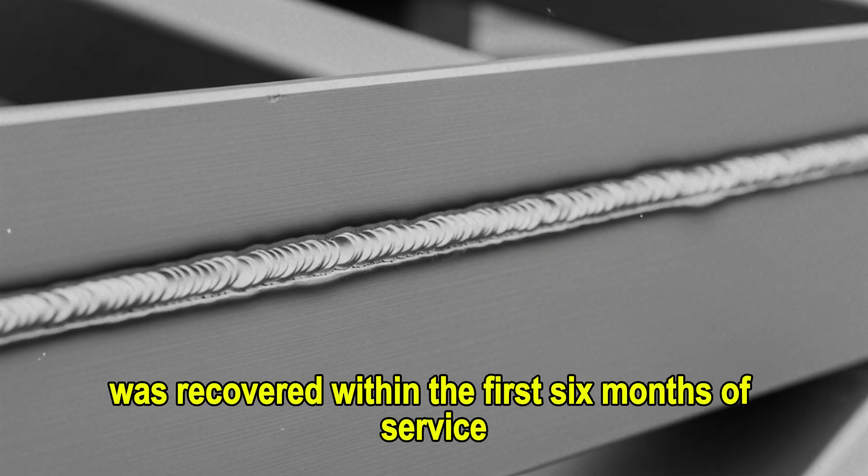Victory ships' zero failure rate meant the additional $600,000 construction cost was recovered within the first 6 months of service, simply through eliminated risk and reduced insurance premiums.

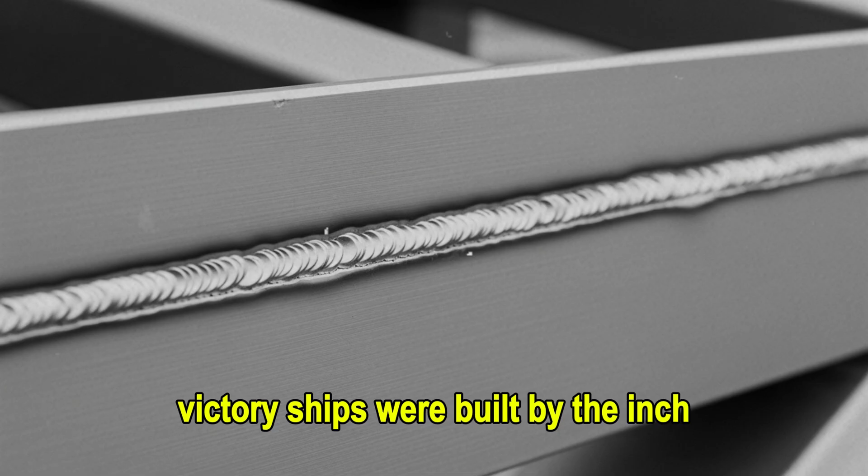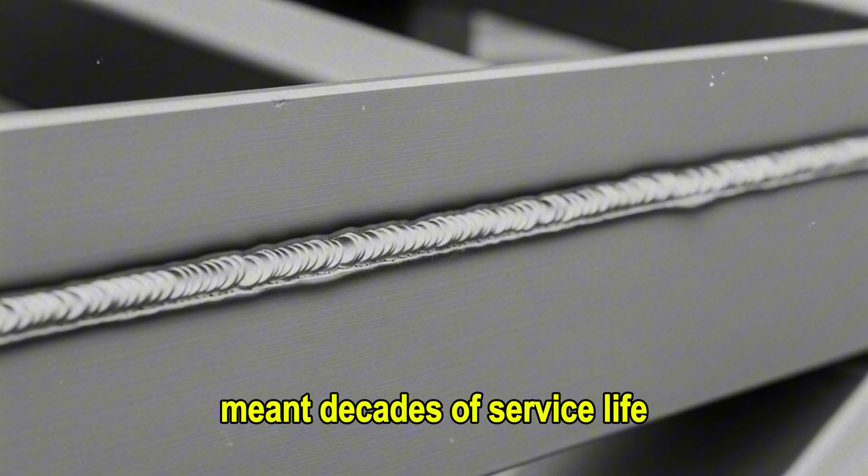By war's end, merchant mariners had a grim saying that captured the difference: Liberty ships were built by the mile and cut off by the yard. Victory ships were built by the inch and measured by the year. Those inches, the careful attention to welding sequence, the obsessive quality control, the engineered crack arresters, meant decades of service life instead of desperate prayers every time the hull groaned in cold seas.